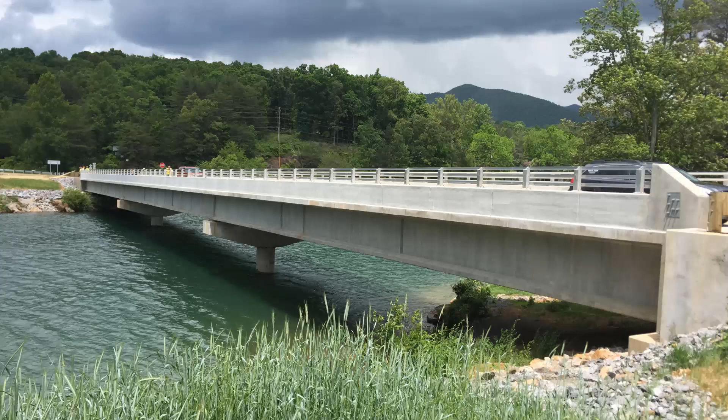All right, so here is the outline for today. I've got a good hour here, so I'm going to be hard pressed to get this in an hour probably. I do want to do a quick overview just to kind of start out and talk about just what latex modified concrete is.

And what makes it different than some of the other cementitious overlays out there. Most of my time I'm going to go through the North Carolina DOT specification and just kind of tie it into the general installation process. So I will touch briefly on the rapid set mixes, both the very early strength and the early strength.

At the end, I've got a section that I talk about pitfalls, things to watch for, kind of some troubleshooting things, kind of tips of the trade. And then at the end, I'll review a few resources that are out there that can help you out in the field.

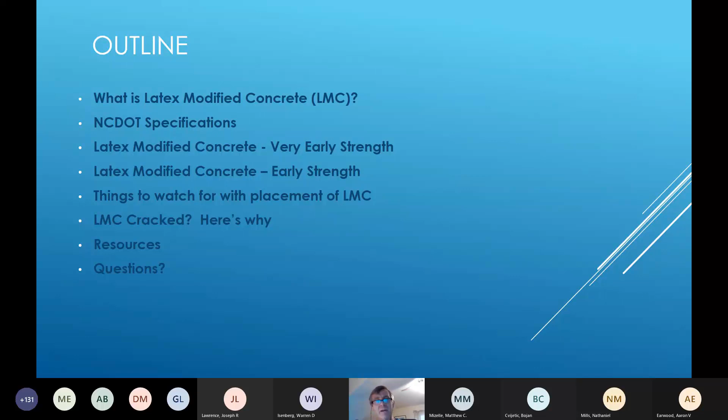So, okay, latex modified concrete. It's a Portland cement-based concrete. The only thing different about it compared to conventional Portland cement concrete is the introduction of the admixture of the styrene butadiene latex, which is suspended in water.

This is introduced into the mix in an emulsion form. What it does is it serves to replace part of the mixing water, which in turn is reducing the water-cement ratio within our concrete. So this has the advantage of being able to help reduce the potential of dry shrinkage as there's less water remaining in the system requiring dissipation.

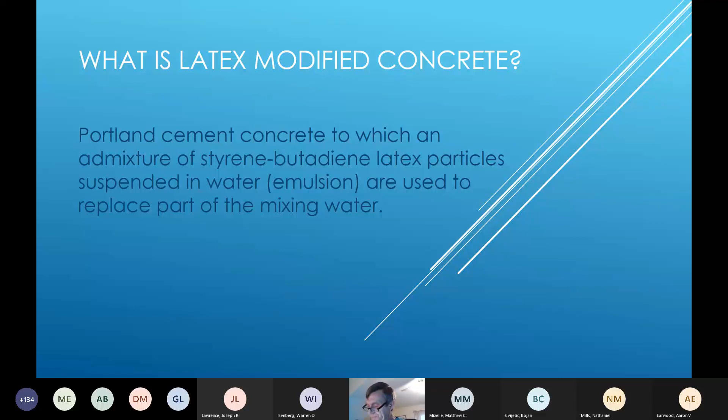These styrene butadiene particles are suspended in the water. They make up about 50% polymer solids. Polymers are what are referred to as hydrophobic. What that means is they're like water resistors.

So as the latex emulsion is introduced into the mix and the water within that mix is being consumed in the hydration process, the polymers are trying to divest themselves from the emulsion, basically. So the polymer particles are attaching to other components of the mix, the aggregates, cement, even the deck and the reinforcing steel it's coming into contact with, whatever they can attach themselves to.

And that includes themselves. So the polymers are even trying to fuse together to themselves, helping to create an elastic type membrane within the mix. So what's happening there is now you have something that's becoming more impenetrable for that water or chloride action to be able to penetrate down into your concrete.

So it's functioning as a water reducing admixture, really in sense of what it's doing. And that gives it those unique characteristics that apply to water-reducing admixtures, which would be helping to improve our paste quality, give a higher density paste, lower permeability concrete, which is what we want, but then also improves the bondability of the concrete to the deck and the reinforcing steel and reduces the volume change between the wetting and the drying period of the latex concrete.

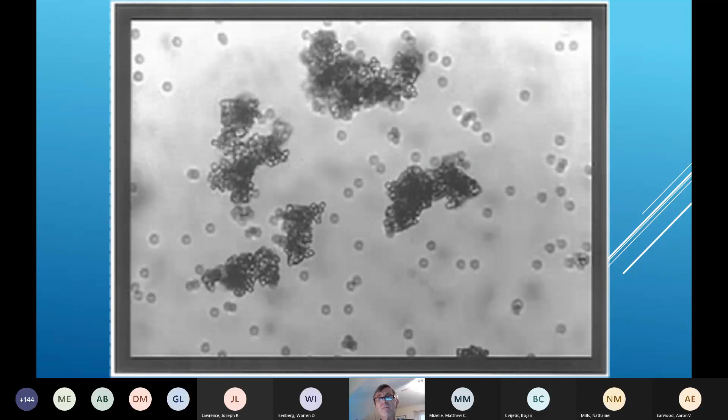Look at the emulsion. It will have a white, milky appearance to it. Look at it up close under a microscope. You see the polymers within the emulsion. Notice how the particles themselves are trying to attract or clump together to each other. So they're trying to build kind of that membrane network within the concrete.

So I'll tackle this session kind of similar to what I did yesterday. Kind of work my way through the main parts of your spec and then simultaneously kind of go over the general process and the best practice applications that are out there. So again, I broke it down into headings within your spec, and I'll look at each of the applicable parts here.

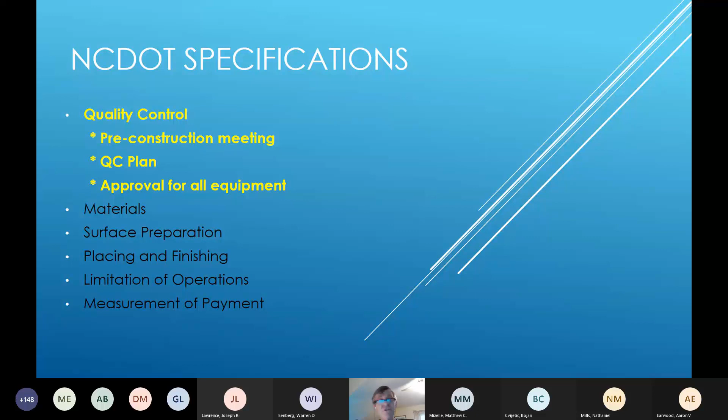So the first section deals with quality control, and there are three minor sections within there that deal with one, pre-construction conference meeting, the QC, and then also your equipment.

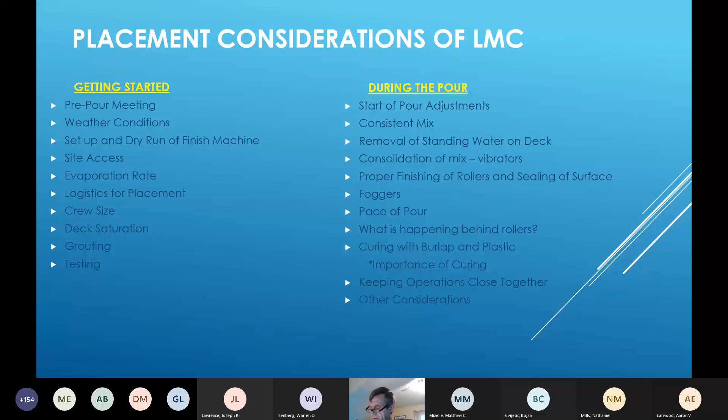For you out there to kind of take a look at the various things that you want to be aware of on the job. Many of these items I'll be touching on as we go along here. So likewise, the QC plan, equipment, I think those are better addressed in some of the other sections as we go along. So I'll just go ahead and move right into materials.

For an LMC mix, it's the normal components you'd find in conventional Portland cement concrete, with the exception of the latex modifier that's added in. Obviously, you need compliance with regard to your state specification on the various materials in the mix.

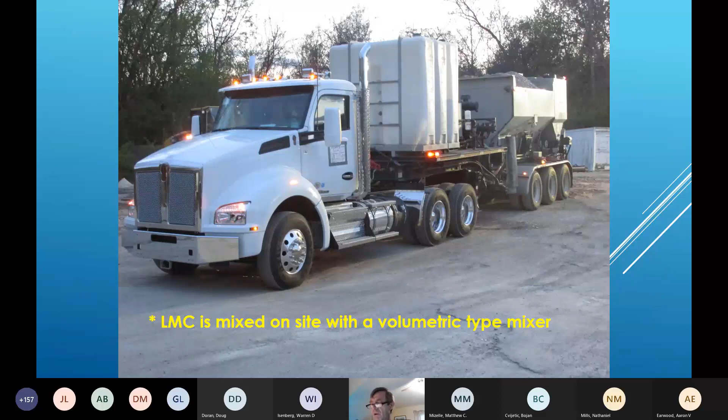The thing that makes LMC a little tricky is that this is going to be volumetrically mixed at the job site, so essentially you have your own batching operation. That means whereas with conventional ready mix, all the quality control would take place at the plant, now you're having to take care of that out at the job site. So that can get tough to do and still provide a high quality product.

So out on site, the contractor needs to appropriately store this material. Coarse and fine aggregates, for instance, ideally that's going to be right at the bridge or in a vicinity fairly close to the bridge to minimize the travel to and from during the pour. Aggregates also need to be stored separately and in a manner which will keep them apart and avoided from contamination from the environment around.

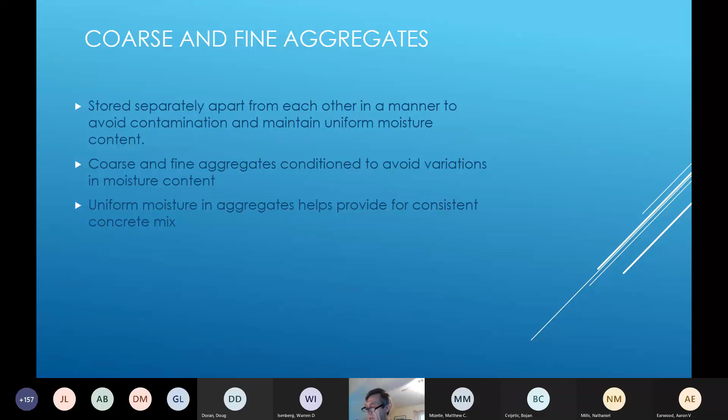The other key is getting a good uniform moisture content. So you have your aggregates on site, you need to provide a location that can be properly maintained. The moisture content is going to be important also.

It may require the use of sprinklers or another means to apply water to the stockpile where the aggregates are stored. Covering up the stockpile with plastic helps keep in the moisture content, prevent it from drying out, and also keep it from getting contaminated. In periods of very wet weather, the aggregates may need to be protected to keep them from incurring excess moisture from rain events. Also, where possible, especially where it's hot, try to get the stockpile in a shaded area to help cut down on the heating of the material. Plus, the use of white plastic can reflect the sunlight.

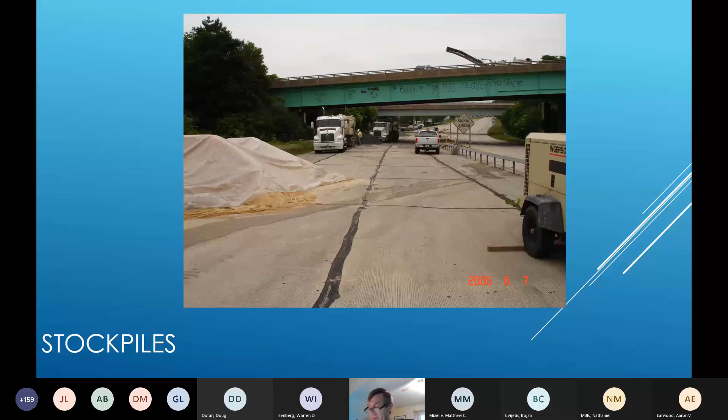So the latex modifier, a little more about it. Federal Highway conducted research on latex and approved latexes to conform to Federal Highway research document 7835 for styrene butadiene latex emulsion, 46% minimum solids by weight. I think the North Carolina DOT spec actually calls for 46.5% minimum up to a maximum of 49%.

Some of the other do's and don'ts that often get ignored on job sites: the emulsion should be stored between 35 and 85 degrees and definitely not permitted to freeze. In a hot summer, that upper limit can be exceeded pretty easily unless there's an appropriately insulated tank or a refrigeration unit on site. Keeping it out of direct sunlight can help too.

Also make sure that the contractor mixes or agitates the latex prior to using it, especially if it has sat around on site for a few weeks or months or however long it's been out there. And then you don't want to mix brands of latex. There's only two suppliers of latex modifier: one is BASF, the other is Trinseo.

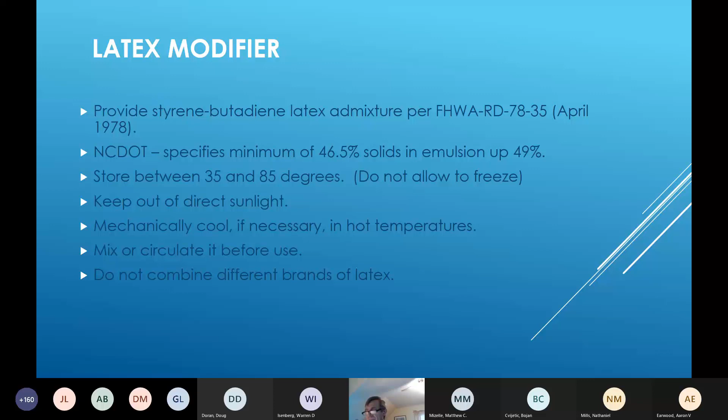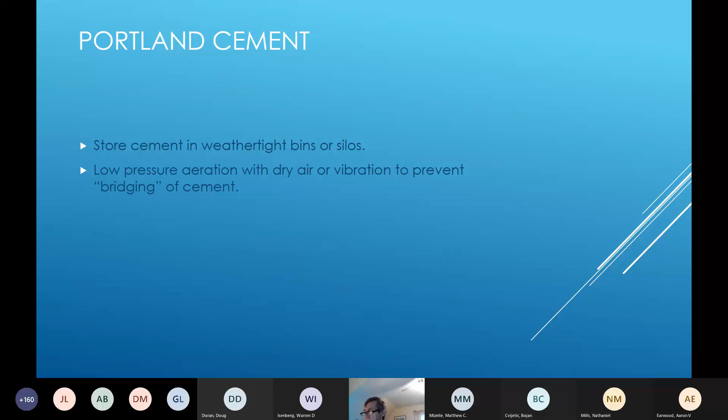Cement, same thing, you're going to have to store it. You're going to need something weather tight, maybe a silo or a tanker on site. And then within the mobile mixer itself, low pressure aeration with dry air vibration helps keep the cement from trying to bridge within the compartment and make sure accurate metering of the cement is occurring.

So outside of the latex, there's no other admixtures within the concrete. There's no air entraining agent in latex modified concrete, but air will be entrapped just normally in the process. If it becomes excessive, defoamers can be used to help reduce that, but you do want to use a defoamer recommended by the latex manufacturer.

Illinois DOT has been using fibers in some of their mixes. I think they're the only state that's doing that. That requires a special fiber cutter that's added to the mobile mixer. But other than that, you don't have anything additional other than your basic components there.

So I'll jump over to mix design, talk about it briefly. Just a look at the North Carolina design, pretty much per recommendations of the latex manufacturers: a 7-sack mix, 24.5 gallons of latex emulsion incorporated into it. Air and slump ranges are pretty much normal, 3 to 6 is common.

North Carolina is a little more restrictive on the amount of fine aggregate that can be used in the mix, 50 to 55% as a total aggregate by weight. Some agencies will allow a little more fine aggregate, you may see it up to 59%. The compressive strength requirements on the North Carolina side are only 3,000 at 7 days, and the water cement ratio maxes out at 0.4. That's pretty normal for latex mixes.

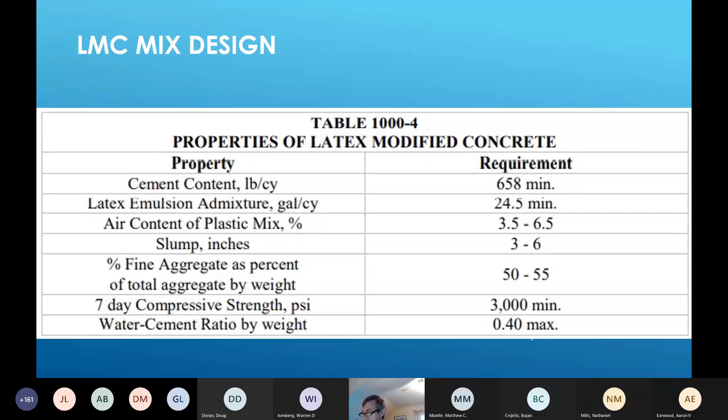It is real important that these mobile mixers meet certain specs. They need to be self-contained systems, self-propelled, capable of continuously mixing and dispensing the material. They also need to have meters to regulate the flow of water and be adjustable by the operator for variations in the moisture content encountered during the batching process.

You want to have a minimum 6-yard mixer out there, and the mixer should also be able to print out tickets that show the amount of cement and concrete that's mixed and dispensed.

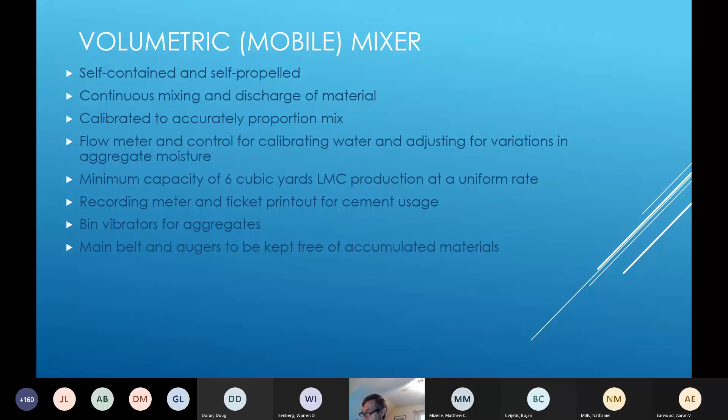Vibrators are always good, especially for your aggregate bins, to ensure that material is being fed down to the conveyor system that runs through the truck. And you want to make sure the belts and augers are kept free of buildup or caking of material. It can mess with the calibration and the amount of material that's needed or being dispensed.

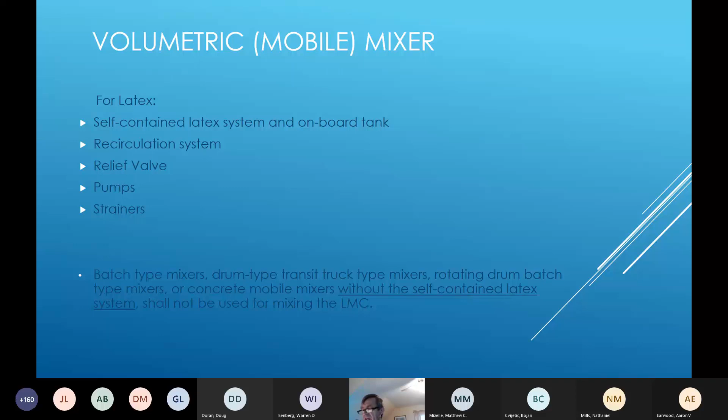For latex, it's important that the tanks are on board and the system self-contained within the mobile mixer, including recirculation type systems. They should have relief valves, necessary pumps, and strainers.

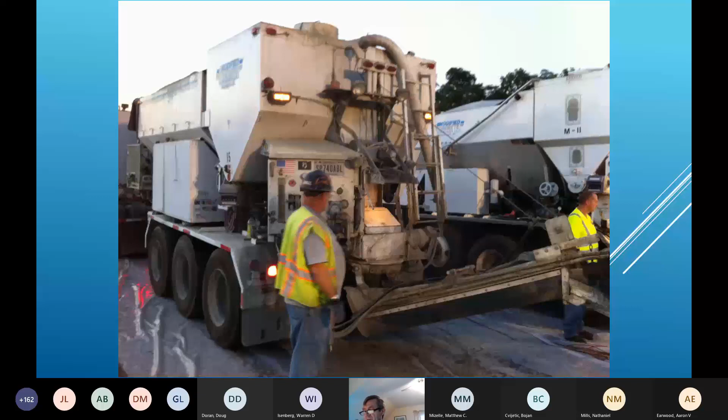Do your testing of slump and air prior to backing out onto the deck if you're going to be mobilizing the truck directly to the back or to the front of the overlay operation.

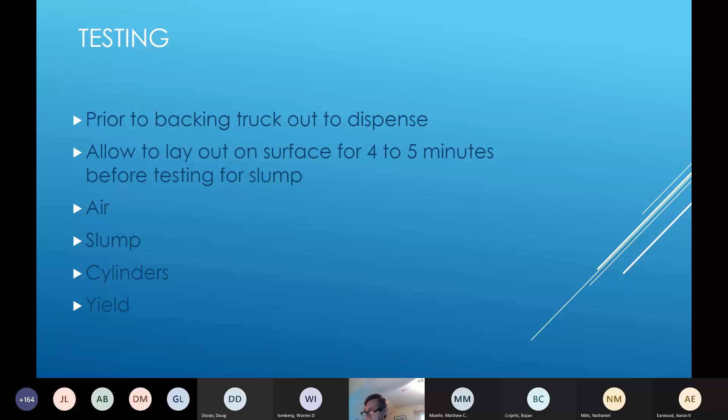LMC tests a little different from normal Portland cement concrete. The material is dispensed and allowed to rest for 4 to 5 minutes. You'll find it's very flowable, so it needs just a bit to start to solidify. So the best way to test it is to run your air test while your material is resting there, and then run your slump. And generally it's good to pull your cylinders after a few yards or so has been dispensed off the truck, and you can get some good uniformly flowing mix.

So here's surface prep now. Let's get into that. I want to touch on the key points for gaining an effective bond, because that's going to be your single most important feature that you're trying to achieve in the overlay installation. So first point is making sure you're not leaving weakened or deteriorated concrete in the substrate. That's going to be an obvious weak point under the overlay that can lead to failure.

Same with microfracturing. Hydrodemolition surface prep, what we talked about yesterday, should help to alleviate that. The overlay is only going to be as sound as what it can adhere to. So a good surface roughness is desired, and that's where that hydrodemolition surface prep comes into play to give us the good mechanical grip between the overlay and the deck surface it's being applied to.

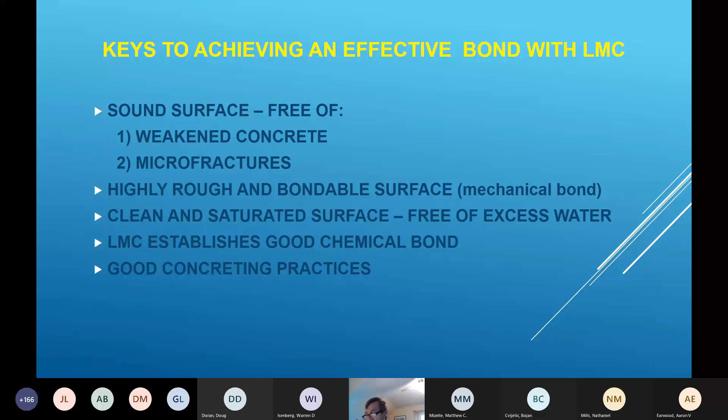When you're blasting, you're getting a good head start on your deck saturation - if you're water blasting, you're already watering the deck out there to a certain extent. The surface needs total saturation to the point of refusal, or saturated surface dry condition, SSD condition. Especially in hot weather, it may take several hours of wetting just to cool down the deck. The North Carolina spec requires the deck surface maintain this SSD condition for 12 hours. That's a really good point in your spec - I like that. That's nice.

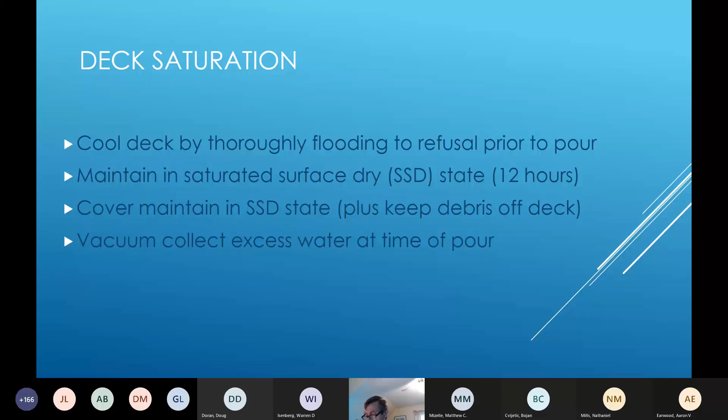Once it is saturated, it needs to get covered securely to keep that moisture locked in and not allow the deck to dry back out. That covering also serves to help keep the deck clean as well. So there's a look at the deck covered.

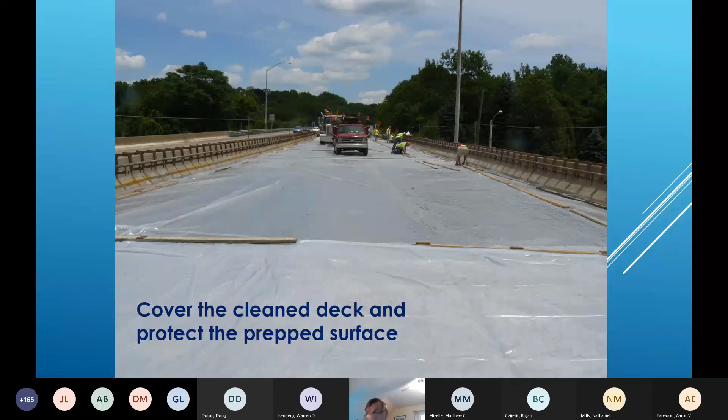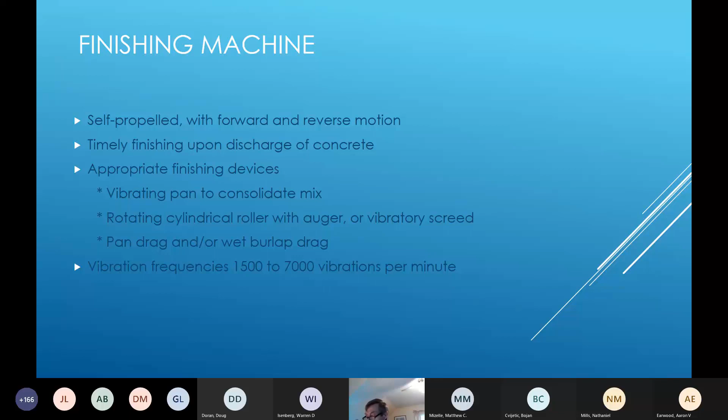Then we're ready for the placing and finishing requirements in the specification. Generally a self-propelled Bidwell type unit with vibrating pan, rotating cylinder with auger or vibratory screed, plus a pan drag or a wet burlap drag. You want to get the finishing machine to the right elevation, obviously - that's going to be important. Dry run the entire deck to make sure the appropriate depth is achieved for grade control purposes.

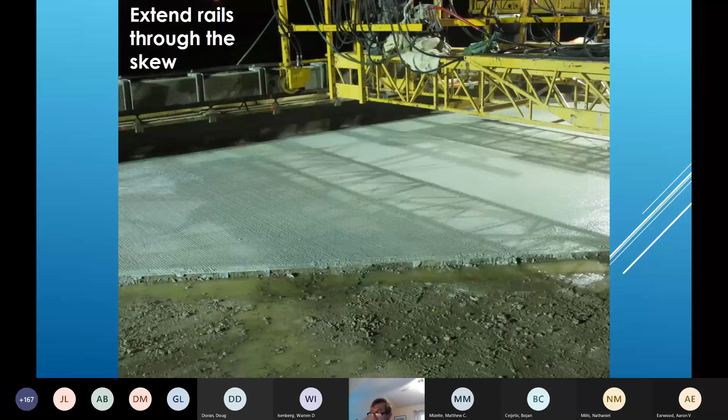The North Carolina spec does require a filler block to help check that correct depth. Make sure your rollers are good and squared up to the inside rail that the carriage is going to ride on. This prevents the LMC from coming off the back end of the rollers and leaving tailings. Make sure you have enough rail installed so the machine will finish through the skew. You want the machine to run all the way through the skew and not do any hand finishing on that skewed portion, as much as you can control that.

Surface prep dictates what we need to do for grouting. The nice thing with hydrodemolition is that grouting is not required on the horizontal portion where you're hydroblasting. It will still be required on vertical surfaces, such as along your curb lines, joint areas, scuppers, areas like that. Now if you're just milling a surface - which some agencies still do as a surface prep technique instead of hydroblasting - I think that's a kind of risky way to do it, but if you do that, you do have to grout your entire surface to help with that interlock.

You have to make sure the grout is applied in a manner so as not to dry out prior to the mix getting to it - that would create a bond breaker between the deck and the overlay. Grouting is conveniently done by taking a bristle broom and pulling material from the pour out ahead, taking the paste from the mix on the broom and very liberally brushing or scrubbing it back and forth into the surface. It's very important this operation is kept close to the pour. If necessary, you can always go back and retreat it if it seems like they're getting too far out ahead and it may potentially dry out - they can go back as often as needed to keep refreshing it.

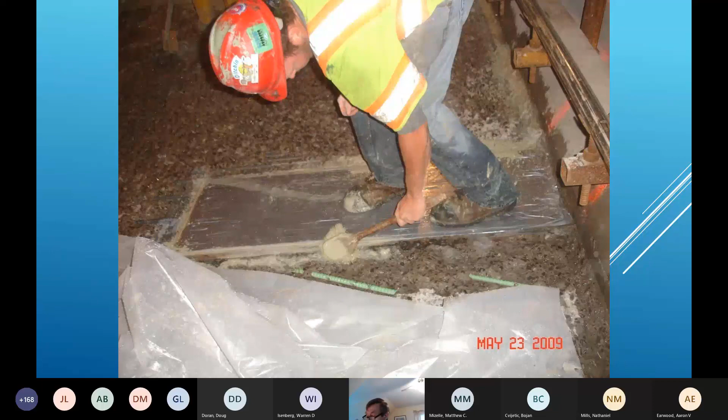Rub it into the vertical faces at the joint. Make sure the vertical surfaces are getting blast clean very well ahead of that, just like the horizontal surface - and maybe even more so at those areas. Those are areas that could use extra detail normally. Here you have a laborer just brushing in some grout at a drain area.

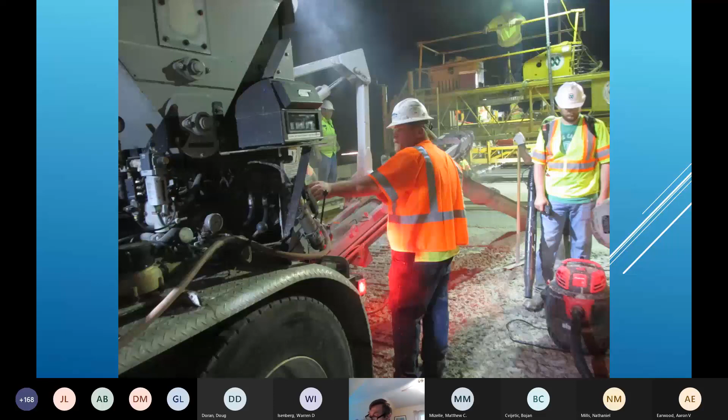And anytime you're dealing with volumetric mixing, it's really nice to have a good, experienced operator on the site dispensing the material for you. I'd recommend a shop vac to suck up your excess moisture that may be accumulating on the deck, and really stay vigilant on that.

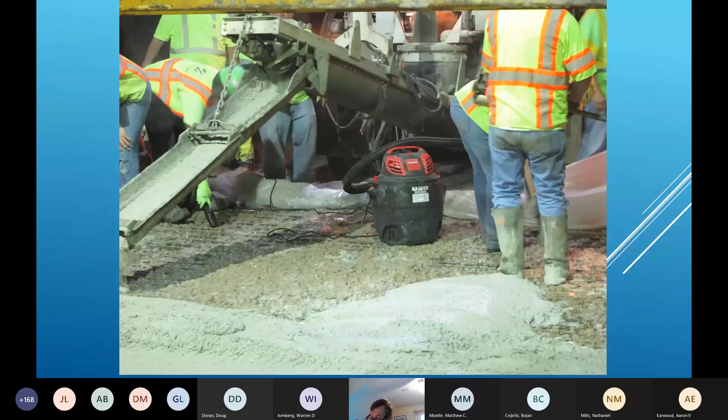The crew often has a tendency to start off well, and then as the pour goes on and guys get tired and lose their focus, they can slack off sometimes. So you do want some good looking mud out there, good flow, good consistency, something nice and fluid and flowing.

Here you see several laborers up front. They're raking in front of the machine. But even ahead of this group, you're going to have people working. They're going to be pulling plastic up behind the mixer or ahead of the pour. You're going to have your shop vacs working to pick up excess water off the deck, and grouting work being done to spread your grout. So there's a lot of work being done in the whole process of this.

You do notice a little bit of minor tailings off the screed in this picture. You want to kind of get your rollers there as level as you can.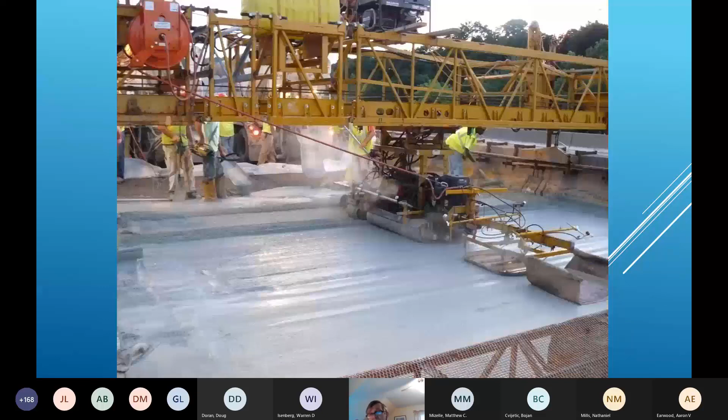This is a better look, I think, as the machine starts out. You want to make sure those rollers are rolling smooth. You get rollers, and you'll generally have a drag pan and a burlap drag also kind of traversing back and forth across the surface to also seal up that concrete for you.

If all these things are working correctly, really the intent is very little or no additional bull floating or finishing should be needed with the main surface. Any floating that is done should be done with a lighter weight Fresno type float.

It can be beneficial too, and actually sometimes necessary, to use fogging equipment. If you're doing it right, though, it's kind of a catch-22. A little water can be a good thing.

Latex seems to crave water. If it serves as a kind of high humidity application, that's the key there. It's great for curing, but too much and too heavy can be detrimental and compromise the surface quality. When your air temperature and/or your concrete temperature is hotter, the added humidity is helpful to help with controlling that evaporation rate that's occurring with the concrete, which I'm going to touch on here in just a second. Humidity is generally your friend.

So when you do use fogging, it needs to be done as an attachment to the finish machine and not manually generally, which is how you often see it happening in the field. Some people don't like the fogging nozzle shooting straight down like it is here and prefer it points upwards. You're just trying to delicately mist it, not applying it as a finishing tool.

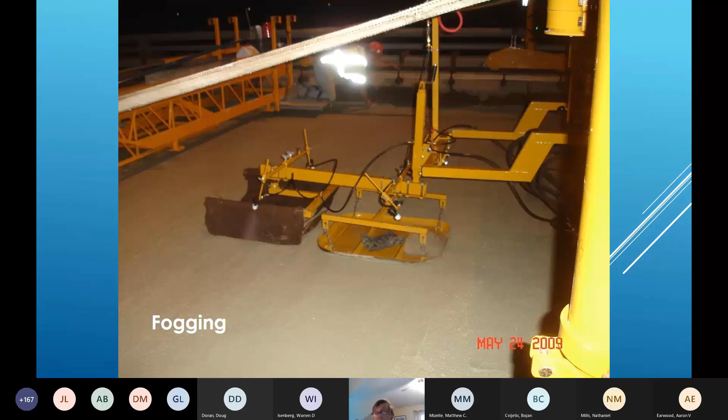Again, these are not finishing aids technically, and not really meant to be worked into the concrete, although often you see them kind of used in that capacity, it seems like. I know in North Carolina you don't do the wet tining for texturing, so that's kind of what they're doing here in this particular slide.

You guys would specify the grinding and texturing after the cure period, but even just your normal finishing operation, you need to be careful that it's all completed promptly. If they are doing any floating, the latex will start to form a crust on it, at which point when you try to finish on that, it's going to want to tear. So the curing should be started prior to the concrete reaching that point for sure.

And then speaking of curing, that's going to be one of the most critical aspects of the operation to get a good quality product.

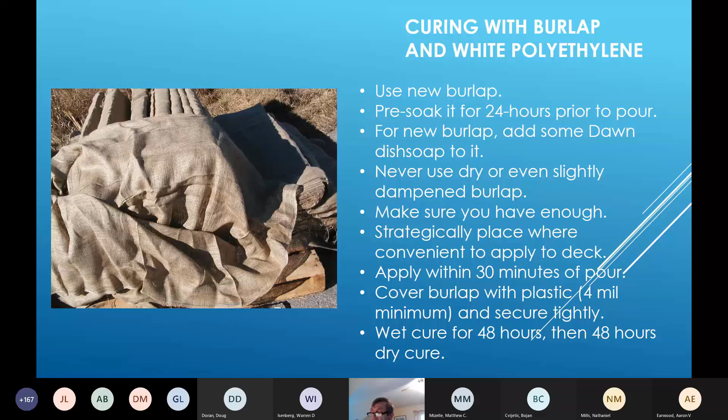You can do everything perfect up to the point of curing, but if you fall short there, it can lead to a real mess on your deck. Some key things: use good quality burlap, make sure it's pre-soaked before the pour, and apply it over 100% of the deck surface. You definitely don't want it drying out or getting dry splotches during the wet cure period, which is 48 hours of continuous wet curing. Cover your burlap with a layer of white polyethylene film to lock the moisture in.

You want to carefully place the burlap with several laborers so as best as you can not mar the surface. Lay it gently, and be sure to overlap the sections a good 6 inches or so to keep the edges sealed up good. Good rule of thumb is you want to get the burlap on within no more than a half hour of the concrete placement, but quicker is better, and definitely before seeing any drying out on the surface of the concrete, or before the latex surface develops that crust.

The contractor can't be out there right before the pour and start trying to wet burlap down. I've seen them try to take the burlap dry and just spray it down as they're laying it even. Just not a good practice at all.

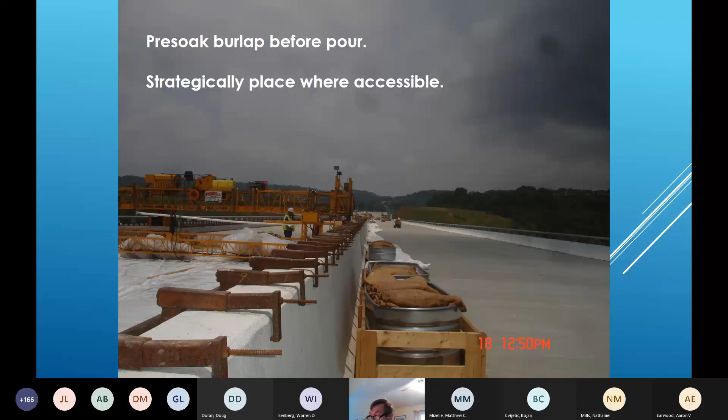Definitely not acceptable. The best thing to do is get large tubs, soak it down the day before. Kind of like Seinfeld always said, you can't over wet, so wet it as much as you can. Soak that burlap down as long as you can to get it good and drenched, and then make it readily accessible in areas where the crew can get to it and install it. You'll often see it loaded onto the work bridge so the crew can just roll it on out there. That's a good way to go. But make sure it's very accessible to the crew, and make sure it's a dedicated crew. It's too critical to the operation for it to be kind of an afterthought to the pour, which I've seen on quite a few pours as well.

During the wet cure process, the white plastic is used to lock the moisture in. White plastic's preferred for curing to help reflect sunlight, especially in hotter weather. Upon completion of the wet cure period, strip the plastic and the burlap, let the concrete air dry for 48 hours. That's the dry cure period, where the LMC hardens and the film forming takes place.

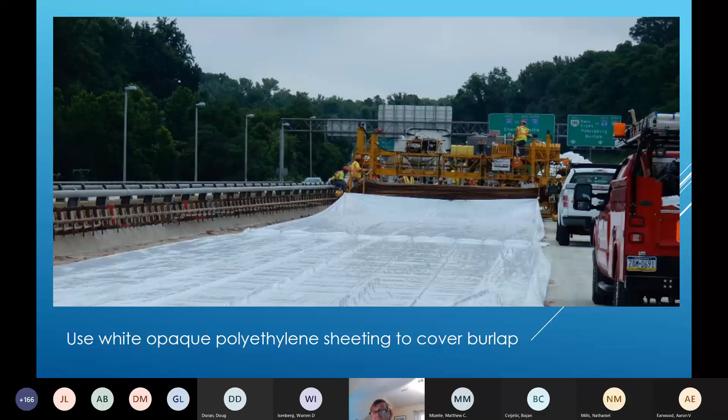So let's look at some limitations of the operation as you guys have identified in your specifications. You want to be on the same page with how the material is going to be dispensed on your deck. Often trucks can be backed directly onto the deck and material placed directly in front of the finishing machine. It looks like in North Carolina that needs special approval though to do that.

If not allowed, the contractor will likely need to use motorized buggies to be able to cart his material up to the finish machine. The laborers can roll up that plastic as that concrete is placed in front of the finish machine, as they're doing here in the background.

Now, North Carolina, I noticed, has some very restrictive requirements with regard to weather, which is a good thing I think. You need to be well aware of both the ambient and the deck temperature. Both can have an effect on the mix. The temps need to be in the 50 to 85 degree window for both. Wind speed up to 10 miles per hour max is allowed.

There's also special requirements for temperatures dipping below the optimum temperature window after the pour, and latex is not to be poured if the temps are predicted to drop below 35 degrees within a 72-hour window. So you have quite a bit of things worked into your spec there that are, especially when you get into the spring and fall, those weather extremes kind of fluctuate a lot, so it can be tough.

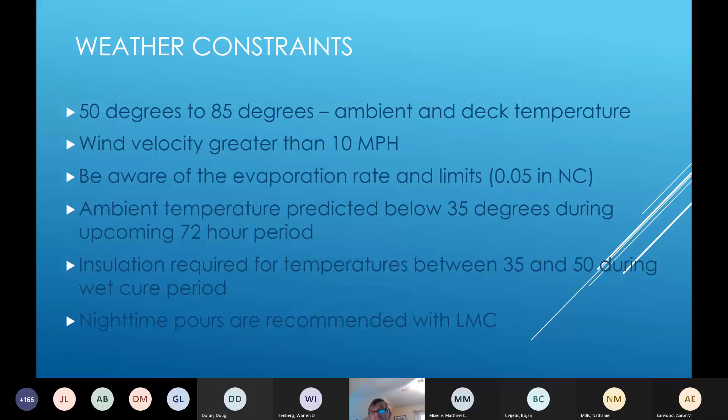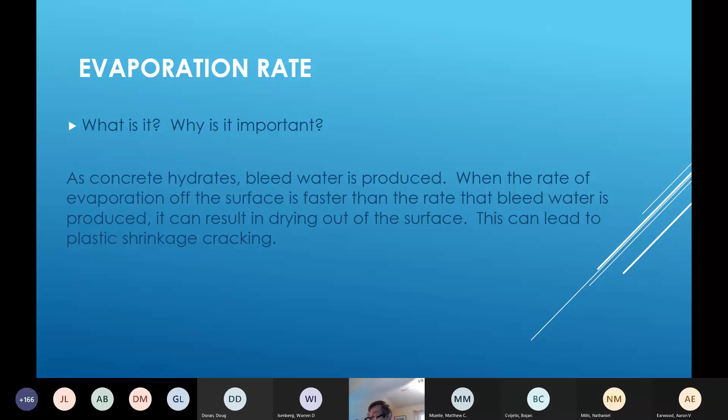Evaporation rate is another one of those areas that can be neglected, but it's important to reducing the potential for shrinkage cracking. Latex concrete, like conventional concrete, produces bleed water, just not as much. The atmospheric and site conditions allow water to evaporate off the surface of the finished concrete. When the rate of evaporation is occurring faster than the rate at which bleed water is produced, that's what can lead to shrinkage cracking in your concrete. So it's a very important and critical concept, this evaporation rate, but it often can be overlooked.

Looks like you guys have great detail applied to that in the spec, which is nice. There is a method to the madness in determining just what that evaporation rate is. It involves knowing the air temperature, the relative humidity, the concrete temperature, and the wind speed.

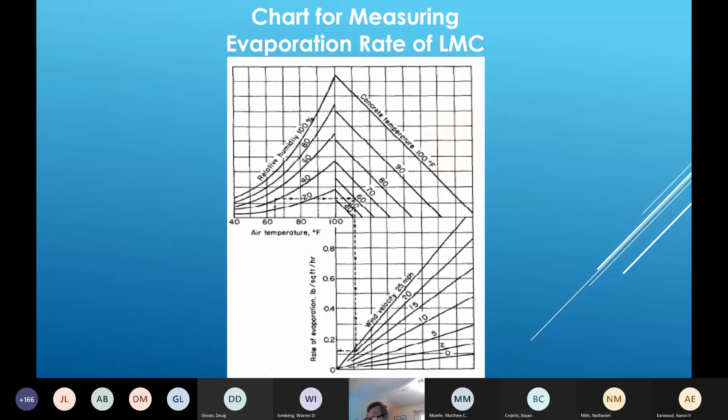ACI produced this nice little chart to help with determining the evaporation rate. You start by entering the chart with the air temperature in the upper left quadrant. In this case, we're using 65 degrees as an example. With the known air temperature, you proceed vertically to the relative humidity. If the humidity is 40%, you intersect your graph at that point, and then track horizontally to the right to the correct concrete temperature, in this case 60 degrees. Then go down vertically to the wind velocity, determined here in this example to be 25 miles per hour.

For North Carolina, that would be a red flag right there. You couldn't pour. North Carolina spec says 10 miles per hour is the maximum allowable wind speed. From there, you move horizontally left to determine what the rate of evaporation will be. Here it interpolates to about 0.12, in pounds per square foot per hour, which would fall outside your North Carolina requirement of 0.05. Pretty tough standard to meet. Most states usually use 0.1 for their standard, but you guys have 0.05 in North Carolina.

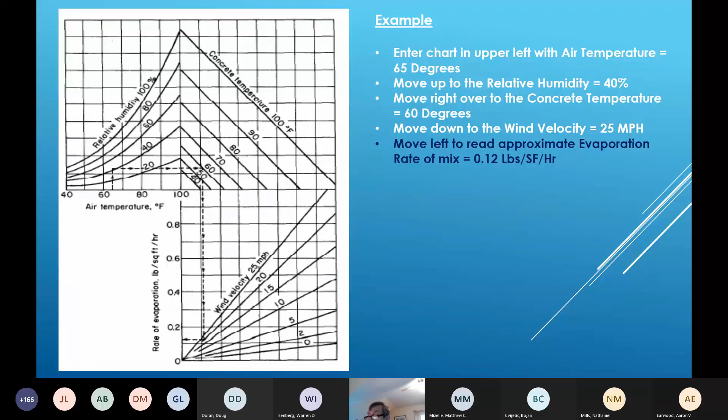When the evaporation rate is at 0.15, that's kind of where it's anticipated that shrinkage cracking is likely to occur with LMC, without other precautionary measures being taken. Some states will allow other measures to be used to get an acceptable rate, such as maybe setting up windbreaks or something like that to help.

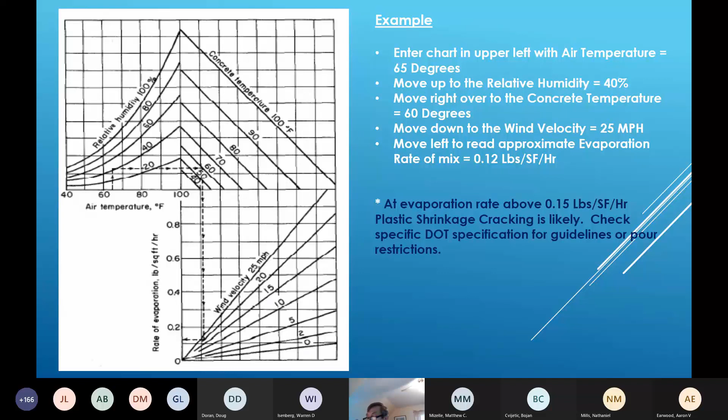The last part of your spec deals with measurement and payment, and the 3 pay items in the North Carolina spec work good. I think you got it laid out pretty nice here. There's a pay item that handles the installation aspect of the overlay in a square yard format—what it's going to cost the contractor to install it and do all of that setup. Then there's the actual cubic yard volume of concrete, more your actual material cost, or at least that's how it should be bid, I would think, for this item. And then you have the texturing pay item that's done afterwards.

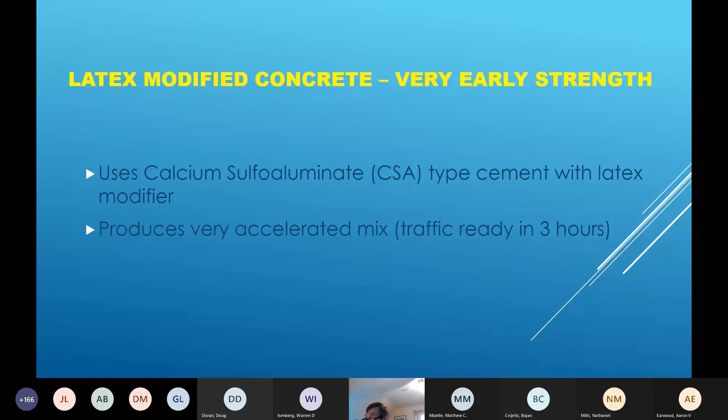I'm going to jump gears here slightly and look at latex modified concrete very early strength. This is something North Carolina, I think, has used a lot. The VES mixes use a calcium sulfoaluminate cement. This allows for rapid strength gain in as little as 3 hours. The characteristics of the concrete are really the same as your conventional latex, just the strength gain being the significant difference. One thing about the North Carolina spec I noticed is the stipulation of experience by the contractors, which I think is a very wise thing to include.

Few states do this. There are a couple that do, and I think it's a smart thing to do. The contractors need to show what work they have done with these VES mixes in the last 5 years according to your specification. So I think that's a really nice little caveat you have in your spec there.

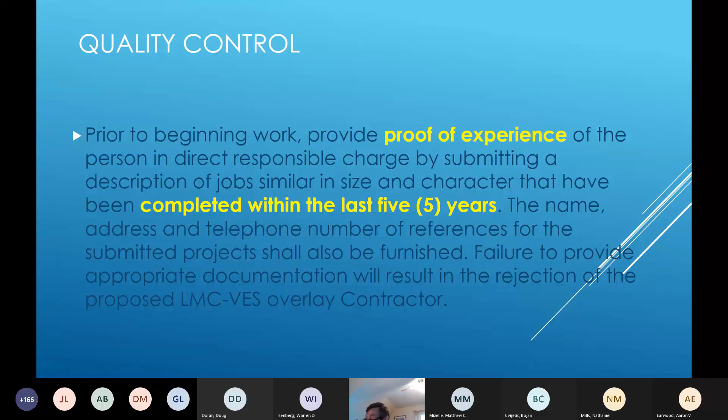These are also 7-sack mixes in favorable temperatures above 60 degrees. You should be able to obtain a 2,500 psi compressive strength in 3 hours. I would say you should probably try to limit pouring to 60 degrees and above with this mix, because when you get below that, it doesn't want to kick over as fast as when you have the higher temperatures. So in cooler weather, you'll see a noticeable difference in the strength gain, while in warmer weather, you're just going to get the higher breaks and faster too.

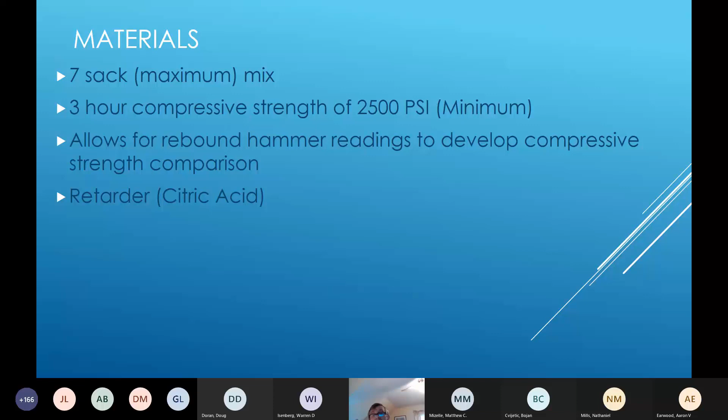Something else in the North Carolina spec that's rather unique is the allowance for rebound hammer testing to gauge comparable strength development. That's interesting—I haven't really seen that in other specs.

Since these surfaces are usually used in situations where the turnaround's quick, the time for saturation of the surface is scaled back to just 2 hours instead of the 12 hours that the Type 1 surface LMC would require.

A few other unique features: it looks like you require 2 layers of wet burlap in lieu of the 1-layer wet burlap and the visqueen covering, so a fogging system is used. There's also a stipulation that for thicker overlays, more wet cure time may be required as specified by the engineer.

And with the quick opening, the grooving's delayed, but they need to do that within 7 days.

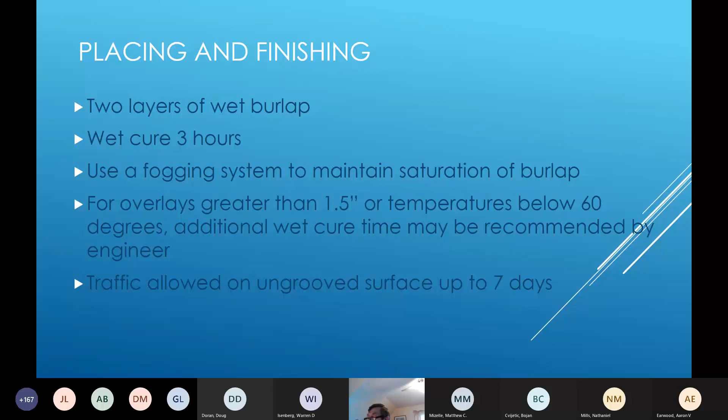Another interesting thing in the specification is the evaporation rate, very key with these quick-set systems. Not only does the contractor need to determine the evaporation rate at the time of pour, but within the specification you're asking him to project conditions during the pour and determine if there's going to be any changing conditions that might hinder the placement. That's some good foresight there.

In this particular case, the contractor does have the option to provide some other measures he might be able to take to reduce that evaporation rate, such as a windbreak or something like that.

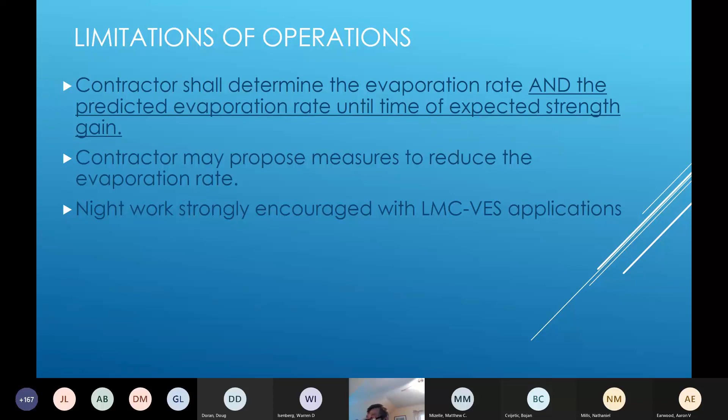Now I wasn't sure if you guys have actually started using the early strength mix yet, or if you're getting ready to, but you have a specification out there. The early strength mix is not quite as quick setting as the CSAs, so these mixes are going to be more like a Type 3 mix.

The biggest difference is going to be in the cure times. You have a 24-hour wet cure time and 24 hours of dry curing, so a little bit in between your CSA and your conventional Type 1 mix.

The only thing I'd add is you probably want to check with your latex manufacturers to verify the cement proposed is going to be compatible with the latex being used. Seems like that's come up on a job or two with compatibility issues for some reason on the cement.

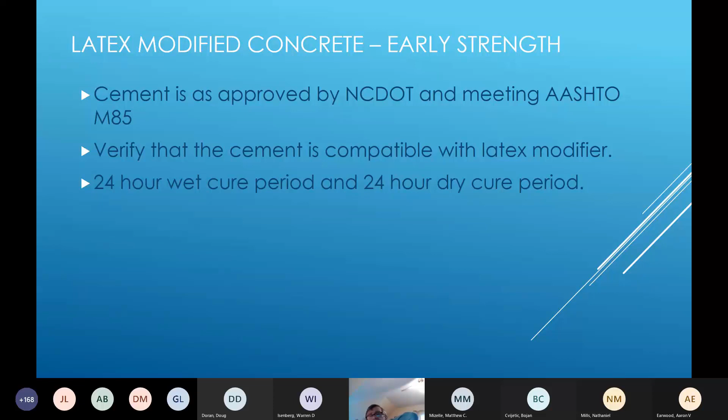A little list of things to watch for now with the pours, and this would apply to really any of the mixes out there using the latex.

It's not enough to just go out there now and start spraying down your deck in front of your pour because you have dry spots. That's not allowable or acceptable. So you do want 100% coverage of your surface.

It's critical for the inspector also to be on top of the amount of water on the deck, not just if it's dried out, but not allowing ponding water in front of the pour. It's a bond breaker that's waiting to happen. Plus it compromises the quality of the mix at your interface there, which is where you really need the good quality mix - that bond line is your most important area.

So the contractor should have a couple shop vacs stationed in front to pick up that excess water - 2 is best, 1 on each side of the pour line.

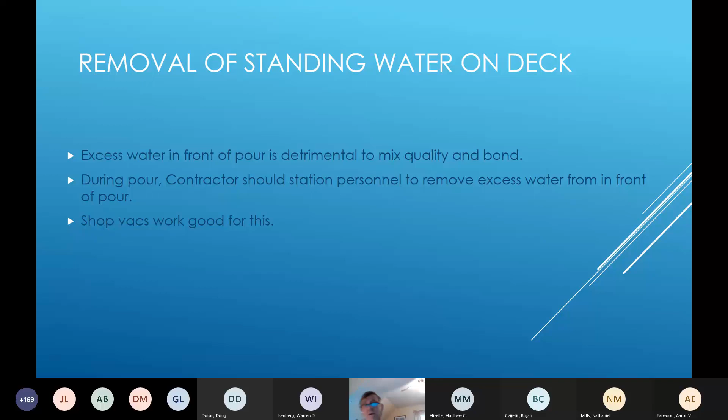So you really want to make them use shop vacs. On these hydro'd surfaces in particular, there's a lot of areas where water can pond, especially when you get those variable depth depressions where you have reinforcing steel. So make them use a shop vac and suck this water out - they need to be getting that out ahead of the pour that they're making.

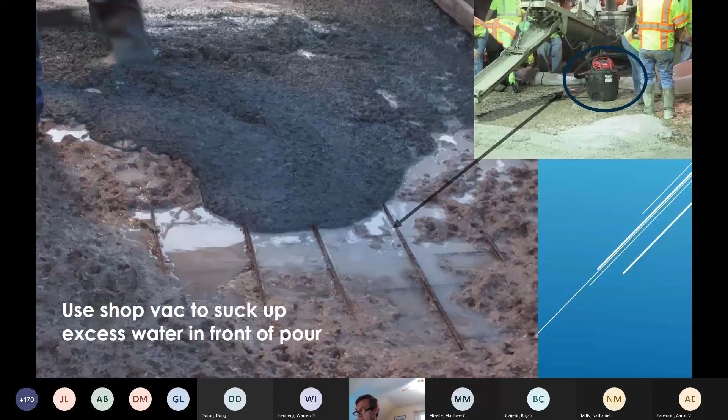If you don't do that, what you can get is a settlement in those areas as the finish machine is running over it. So the finish grade may get a slight depression in that area, and you compromise the surface quality right there. You get those depressions if you don't consolidate some mix in there ahead of that pour. For real deep pours too, if you're pouring maybe 3 inches or better, you're probably good to go ahead and vibrate the whole surface as well.

You want to watch the rollers, make sure they're good and level. If you're seeing these tailings, it's obviously out of whack a little bit, needs some adjustment. When these rollers are not level or square, it's creating much more work for your finishers, obviously. So ideally, the less you have to touch that LMC, the better.

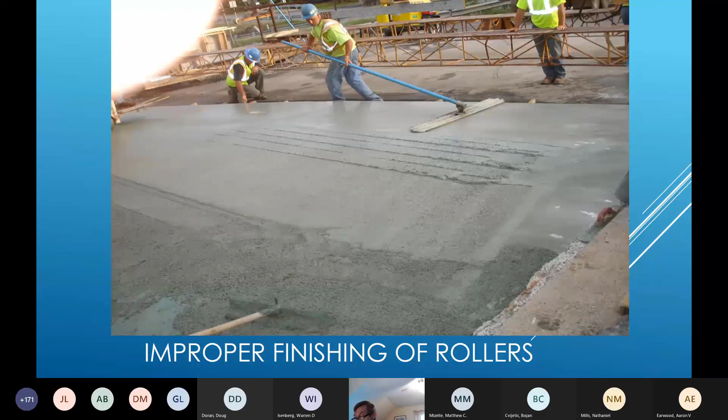Be aware of what's going on behind your rollers. There's going to be handwork along the edges, the curb lines, and you want to kind of discourage the finishers from being in the mix, working it. They really should be up on a curb line or a work bridge or a platform of some kind that's maybe attached to the finishing machine to help finish that area.

I think the North Carolina spec does a real good job addressing how to handle longitudinal joints for your stage construction. Just wanted to stress the importance of the detail here. This is actually on an Illinois job - reason I know is the fibers in it there. What I wanted to point out, though, is the slobbers there. Those all need to get removed.

One trick I've seen is that where you have the overage pour zone, and that would be that 4-inch section where your spec says you're going to remove that. What I've seen is a contractor will actually lay some plastic down on the deck when he's pouring just in that overage area, so that any of that excess concrete that is not adhering, you don't want that excess concrete adhering to your adjacent deck necessarily because you got to get that out of there, right? So when the contractor performs that saw cut and needs to remove that overage area with that excess concrete, he can just pull his plastic back. He takes up all that concrete and leaves the substrate fairly clean.

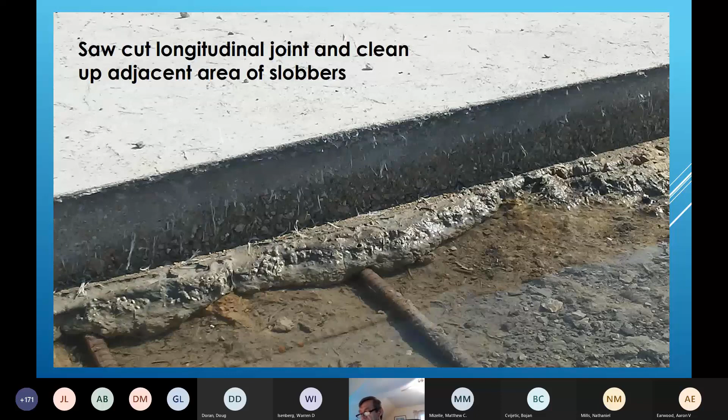He is going to have to do some final abrasive blasting there, obviously, but here the contractor's just created a lot of extra work for himself by not putting anything down to protect himself there.

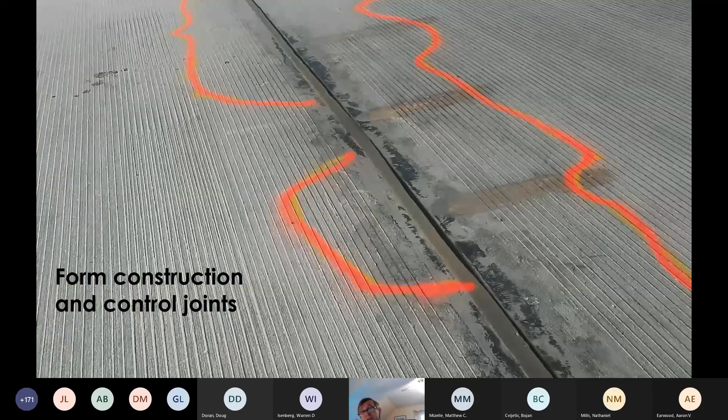So what you're seeing in this picture here, the inspector has noted delaminations in the joint area. Well, guess what's happened here? What's happened is, come to find out, the contractor poured across this joint and then came back later and cut it. Bad move. Shouldn't do that. And your spec actually doesn't allow for that. So what he's done is he's caused a debonding to take place here because the joint was locked down when he poured across it, and with temperature fluctuations it had to give. So it caused delaminations at his joint area. And that's why you need to form your joints - you have to make sure they're able to move.

So I wanted to summarize one more time with regard to curing, because it is so important to the process. In most cases, curing latex includes both a wet and a dry curing period, and this is going to depend on your cement type, obviously, that we talked about earlier. But the wet curing is one of the most important parts of the latex installation process, if not the most important part of the process.

So I just want to reiterate and stress the key things to keep in mind, such as don't delay in getting the burlap down. The nice thing about you guys doing post-cure texturing is that if you're slightly marring that surface, the grinding, grooving operation is going to help correct some of that imperfection for you. But it's better to err on the side of getting the burlap on faster than not fast enough. So as soon as that surface will hold the burlap, get it on, before the latex forms that crust on it, and is trying to dry.

Generally about 30 minutes max, maybe faster, especially on rapid set. You're almost putting the burlap down behind the finishing of the surface, essentially. But make sure it is good and wet and applied to the latex. Don't let the contractor take dry or lightly moistened burlap and then try to dampen it while he's putting it on. It needs to be good and soaked.

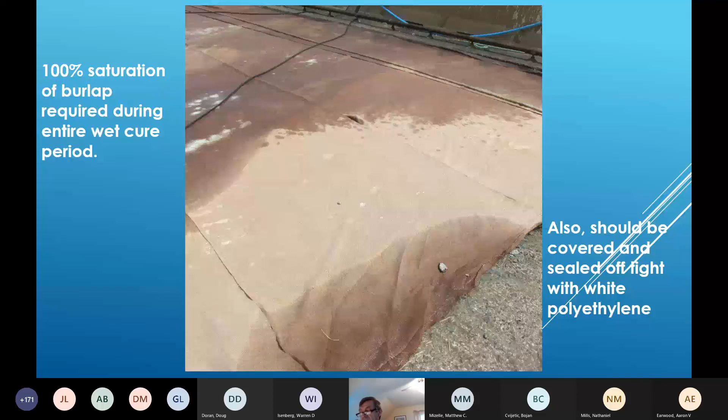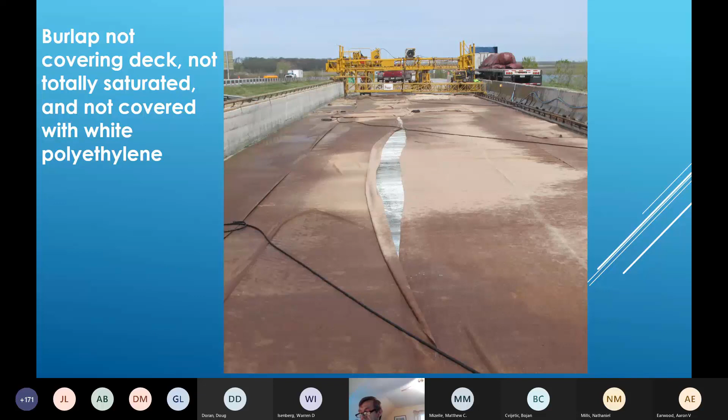So with that, a few pictures about burlapping issues. Here you can see the problem: burlap is dried out on the deck. If you look a little closer, this is actually the same job. They don't even have the plastic on it yet, and it's drying out all over the deck. The wind has blown apart the burlap. It looks like they're trying to get soaker hoses on it. Just poor job planning and covering of the deck here. They're way too late on this.

You want to use good quality polyethylene sheeting, free of visible defects in covering. I think your spec says 4 mils minimum.

One thing we see in other states is contractors trying to go to burlene - I don't know if you guys are running into that or not, but it's kind of discouraged by the latex manufacturers because usually you're trying to take that out dry and put it on, and that's what you don't want. You don't want dry material hitting your deck and having the possibility of trying to suck moisture out of that deck. Don't let the operation get too far apart. This can especially happen if the contractor doesn't have enough people dedicated to his operation.

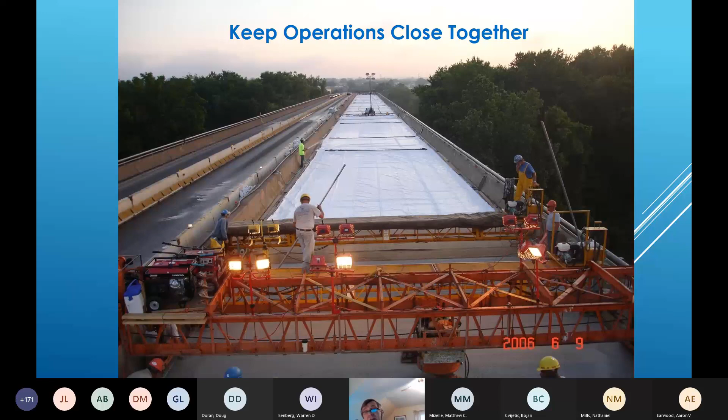There's some other random thoughts here. Be aware of structural cracking that may be evident in the deck you're pouring on. Are there traffic vibrations occurring within stage construction or noticeable impact loads? Especially if you're pouring on longer steel plate girders, there can be quite a bit of deflection in those. So truck traffic is the enemy here. It's what's going to be inducing the live loading, and it can hinder the setting of the concrete.

It's just hard for concrete to harden without cracking if it's going to continually be vibrated and moved around by the deck bouncing around. So another good reason to pour at night - you can control traffic a little better, slow down trucks through the work zone, and reduce the deflection and vibration. Be sure you have all the delaminations out of the deck. Pretty obvious there. Be smart. Use good concreting practices, both hot and cold.

If you do get some shrinkage cracks, don't panic. Evaluate the extent of that - it really comes down to bond. If you have minimal shrinkage cracking, it can probably be treated with a sealer. Most of the time these are surface type cracking from dry shrinkage, and they're not going to extend through your overlay, just a short distance down into it. This happens as the concrete dries out from the surface faster than how the inward concrete is drying. So sound your deck, make sure you have good bond.

It might be that treatment of the cracks with something like a methacrylate or a high molecular weight methacrylate can seal the crack off from further infiltration or chemicals. Be aware of wider pours that can induce longitudinal pattern temperature control cracking versus more conventional transverse temperature cracks, and make sure there's a go-to person on the job.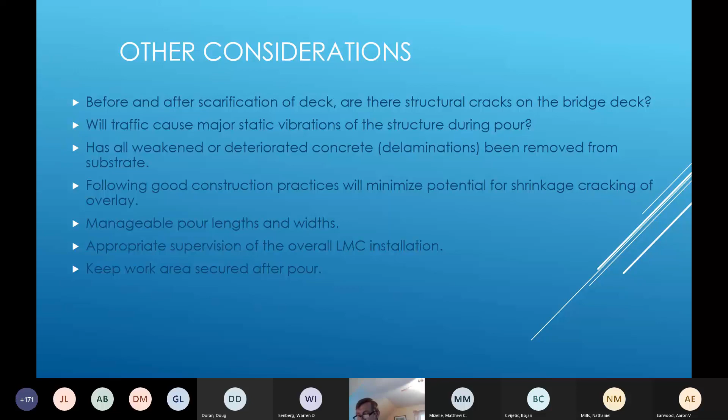Looks like a failure, and when you see failure like this out there, there's really only two things that can be happening. You either have an interface failure where that overlay has not bonded correctly, or you have a substrate failure. It's either something got on there to prevent that bond, or the delam just wasn't out. There might be some microfracturing under it, and that led to the issue starting to fester there.

When I see failures out there, a lot of times it's close to joints, because that's the hardest area to get good and clean and get the quality prep that you want. And when you do get a failure area, it seems like it's really hard to shut off, because you just keep getting it raveling. It continues to ravel. One thing you can notice is if you can look at the material at that failure point and see, is there material that's bonded to that overlay being pulled up from the deck, or does it look like you have a clean separation at the interface?

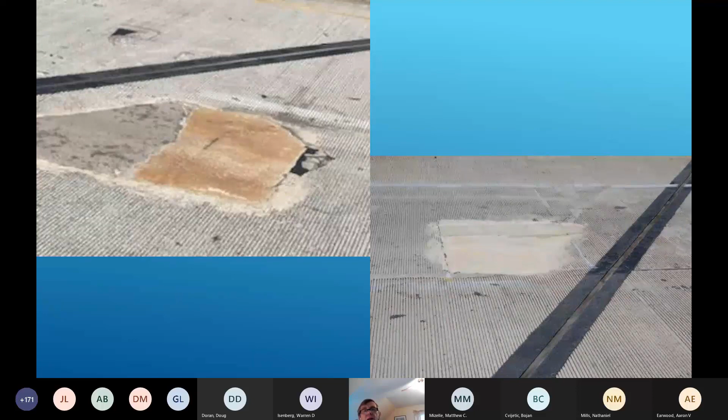This looks like probably moisture. Moisture probably gets down those joint areas, especially when you're using these polymer headers. You get that little gap there between the joint material itself and the overlay, so it's a great avenue for water to get right down there, and then it can start attacking with freeze thaw issues. Sometimes it's good in these types of joint systems, when you're done pouring, to just go ahead and lay a bead of methacrylate or something right along that seam, all the way along there, just to give it an additional measure of sealing at that location.

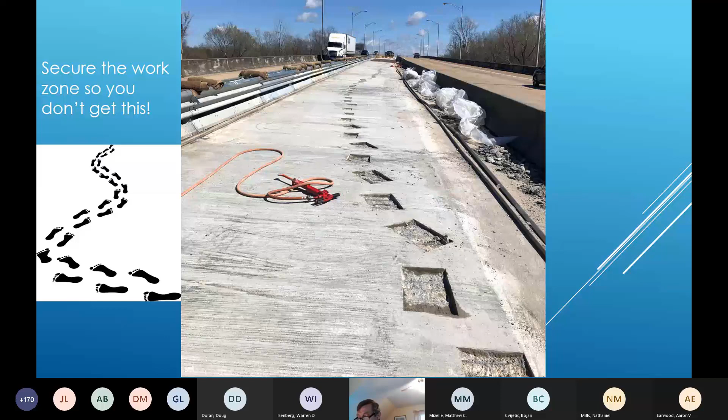Don't like to see this. Someone got out on the deck and walked through the overlay here. Unfortunately, the contractor had to cut all these footprints out and make repairs. And the bad thing is, even though he repaired it, the quality's not going to be good. These areas are going to be susceptible to future failure as moisture attacks it, and the bond just won't be the same. So bad news there.

I'm going to close out here. I know I'm running late here as usual. I want to talk about cracking a little bit because I know that's probably a concern to you guys out there.

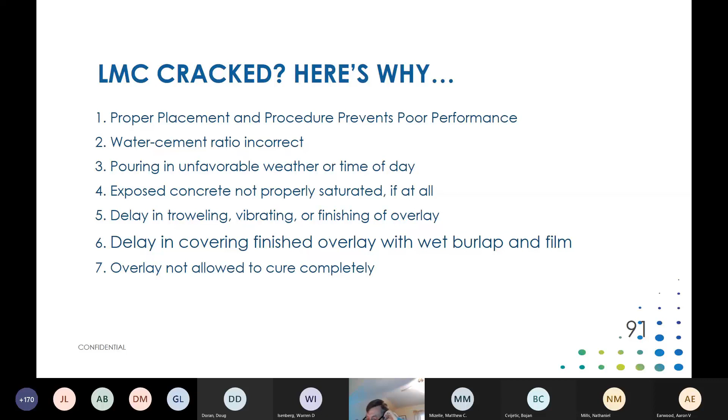We know concrete cracks, sometimes more than others, but why is it doing it? Well, probably most of the time it's going to be related to one of the items on this list here, especially where it's associated with the curing. Like I mentioned earlier, not a cause for panic. You don't like to see it. It's often unsightly, but you want to try to evaluate and react accordingly.

Got a few examples here. This here looks to be a plastic type shrinkage cracking. You can see it's occurring at the start of the pour. It looks like they pulled off the header, and you can see discoloration in the start.

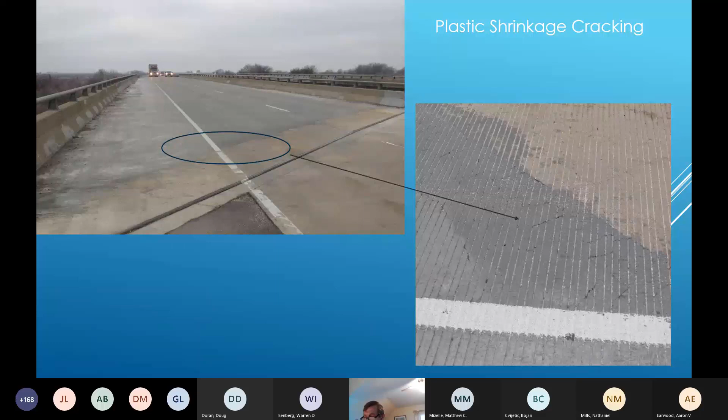So I'd say the mix was probably a bit dry and likely took a bit for the concrete to get covered and curing, especially when you start off the pour, it does take a little while to get pulled away from there, and it takes time. So I imagine there was some extra drying going on here, and it was already probably kind of dry just to start with, it looked like. So the water cement ratio was probably a little low and lacked that cure getting going immediately on it.

This is probably what you see out there the most when you get the cracking. It often does not show up until the concrete really starts to dry out. After the wet curing, the concrete undergoes dry curing, and no more water is being drawn down into the concrete. So the interior part of the mix may have enough moisture, but that outer surface is drying. These are often tough to figure out. Usually they'll be pretty fine and often confined to the top surface, so I don't know that they're even really sealable in a lot of cases.

This was a pretty wide pour here, over a 40-foot wide stretch. Long way to go for a finish machine to go across, so you can imagine getting the curing going is going to be delayed. Also, in this particular pour, the water cement ratio was a little too low in my mind. I think it was down around 0.35. They probably could have used a little more fluid mix.

I attribute this to something called autogenous shrinkage. That's a phenomenon that can happen with thin lift concretes that have a lower water cement ratio and are placed on your in-situ type concrete. What happens is the water is drawn quickly down into the hydration process, and it creates these real fine capillaries that kind of reach back up to the surface.

There's also likely a significant change in temperature, I'm going to guess, during the cure period between daytime and nighttime temperatures, because it was in the fall. One thing I noticed on this particular deck, if you looked at it in the summertime, the cracks are hardly visible to the naked eye at all. You can't even find them. The only time they're really visible is after a rain event or a foggy day, when the deck starts to dry out - you can see the moisture wants to hang around that crack area. Or when it's really cold, the cracks will be more noticeable too. Concrete expands and contracts with temperature, so they appear more readily in the wintertime when it's cold out.

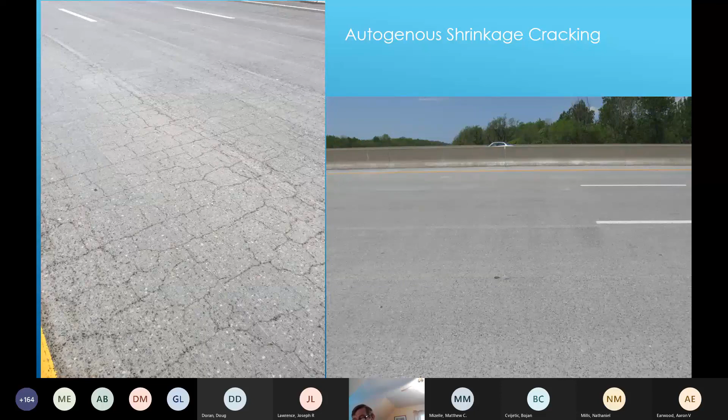I've got a few here. These are structural cracks - apologize, I'm running a little long here. Your overlay will not overcome structural cracking.

On the left is a pour on an approach slab. One thing about approach slab pours is you need to make sure those slabs are good and tight. You need to mud jack under them or inject an expandable foam underneath to seal them up good, so they're tight and not going to vibrate or deflect under load. This probably did not show up, I'm going to guess, for a little while until traffic got rolling on it - good chance well after the contractor left with his taillight guarantee even.

On the right is a classic example again of a contractor trying to pour through a joint and saw it later - it cracked on him before he got it sawed. For wider cracks, something like an epoxy type sealer, which is not quite as low viscosity, may work a little better for filling in a structural type crack.

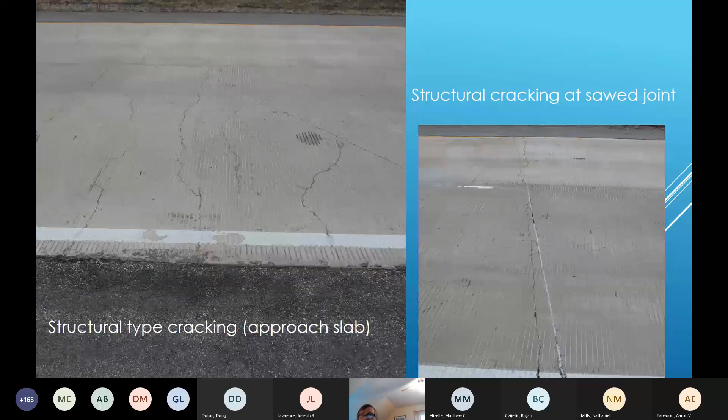This one here is one I did out in St. Louis about 15 years ago. It's a rapid set job, and I keep pretty close tabs on it. I noticed several of these structural type cracks, like you see on the right side.

The thing you have to remember is when we pour these decks back, or these overlays back, in a monolithic fashion, where we've demoed them, the overlay is now acting in concert with the deck - it's acting as a single unit. So the deflections and live loads are going to be reproduced through this. It's the same structural type crack that you have in your slab already. It's just a matter of time before it shows back up, because that slab is working and concrete cracks, and we allow it to crack. That's why we have reinforcement in it.

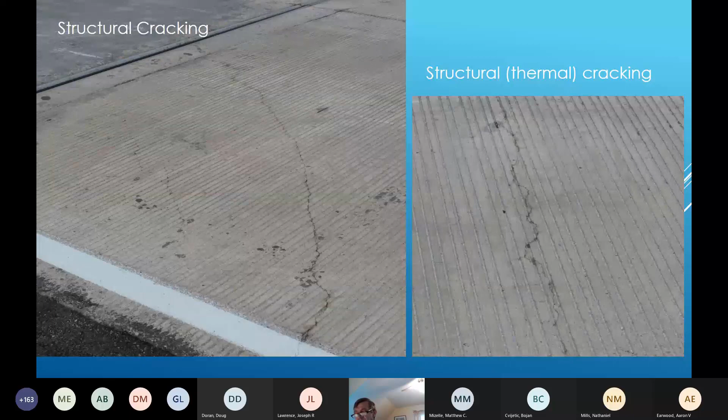So here we've got just some more random structural cracking. This one on the right, I'd say, is more of a thermal type crack. This deck here had several small stray cracks in it, and the contractor was able to just do some localized sealing of the cracks.

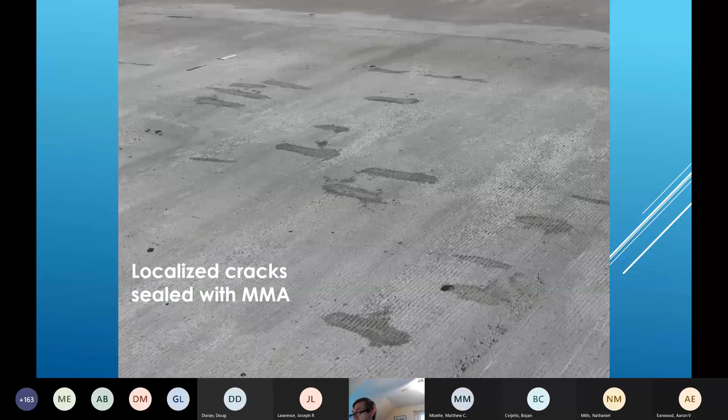Sometimes you get cracking, and this is another rapid set job - you're probably finding rapid set jobs especially may be more susceptible to cracking issues. This one's a little more extensive. When it's not practical to trace the crack with a sealer, it's more efficient to just do a total surface treatment with something like an MMA or HMWM type sealer. Let that sealer soak down in and fill the cracks. Those sealers are going to be the lowest viscosity sealers you can use for fine penetration of cracks. So that's the type of sealing you want to do with these.

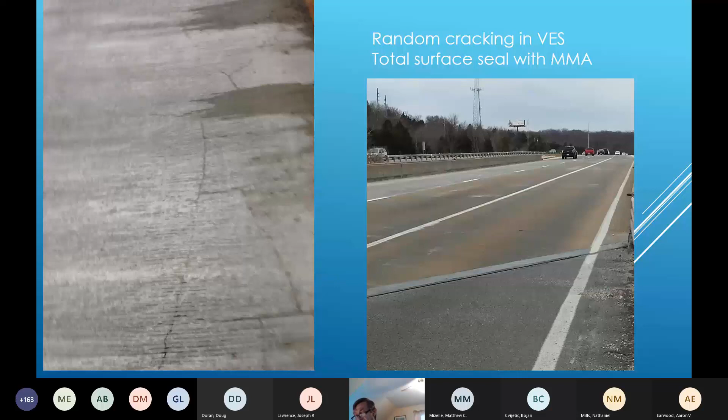Of course, you want to make sure the bond is good and strong with the deck. That's the most important key. If you get cracking, you definitely want to make sure you have good bond. If it's not too extensive, seal it. But if it's too extensive, the owner has the right to just say, you know what, I'm not accepting this - you're going to have to take it up, and that's a bummer. It happens, but sometimes contractors learn the hard way and have to pull them up and redo them. That's why you want a good, experienced contractor out there for these rapid set jobs, and I'm glad to see you have that in your spec, that you do require that.